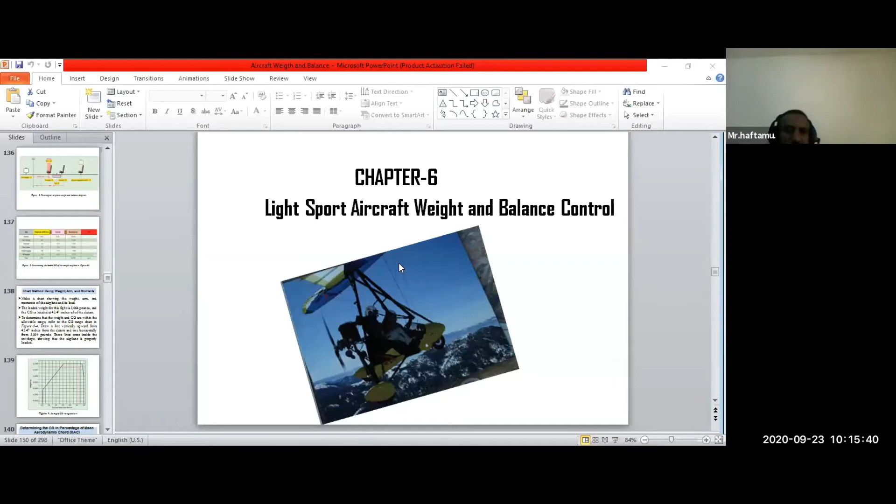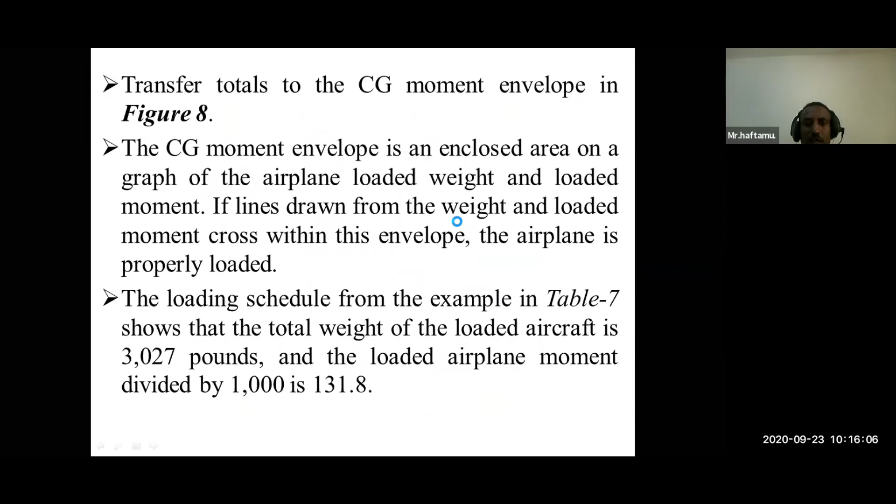So we can start our today's class. Last time we have seen chapter 5, multi-engine aircraft weight and balance items. Today we will see light sports aircraft weight and balance.

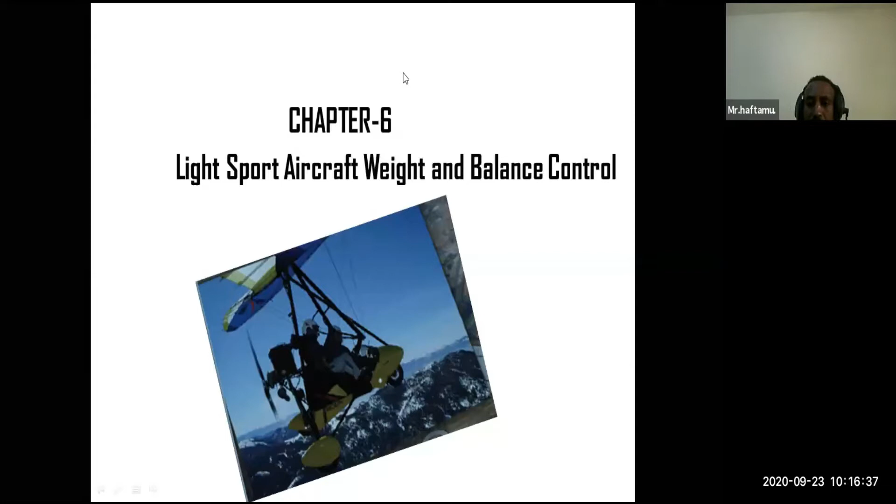There are different types of aircraft operational around the aviation environment. One of those is the light sports type of aircraft, and they have their own specific type of procedure for the weight and balance. So in this chapter we discuss the weight and balance procedures of light sport aircraft.

These differ from conventional aircraft, especially weight shift controlled aircraft, also called trikes, powered parachutes, and amateur built light sport aircraft. These types of aircraft have their own design and nature that make them different, and they have their own weight and balance procedures.

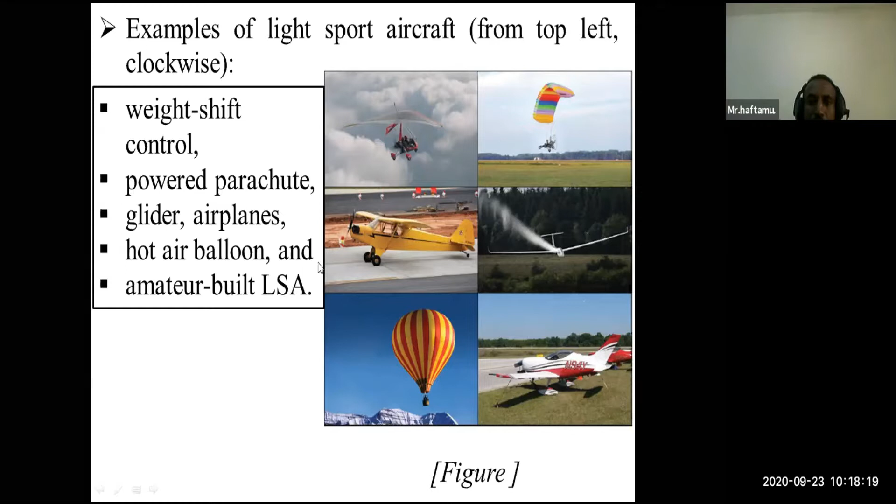For examples of light sport aircraft, as you can see, this one we call weight shift control. This is a powered parachute. This one is a glider airplane. This one is a hot air balloon. And this is an amateur built light sport aircraft. These are the aircraft we call light sport aircraft.

So light sport aircraft is a category of simple, very basic, small, lightweight, low performance aircraft other than a helicopter or a powered lift, and a classification of aircraft specific to the United States. So these aircraft are classified as light sport aircraft.

The Federal Aviation Administration defines light sport aircraft as an aircraft with maximum gross takeoff weight of not more than 1,320 pounds, or 600 kilograms for aircraft not intended for operation over water, or 1,430 pounds for aircraft intended to operate on water or at sea.

So a maximum speed of 120 knots or 220 kilometers per hour, 140 miles per hour, a maximum stall speed of this amount, and a maximum seating capacity of not more than 2 persons.

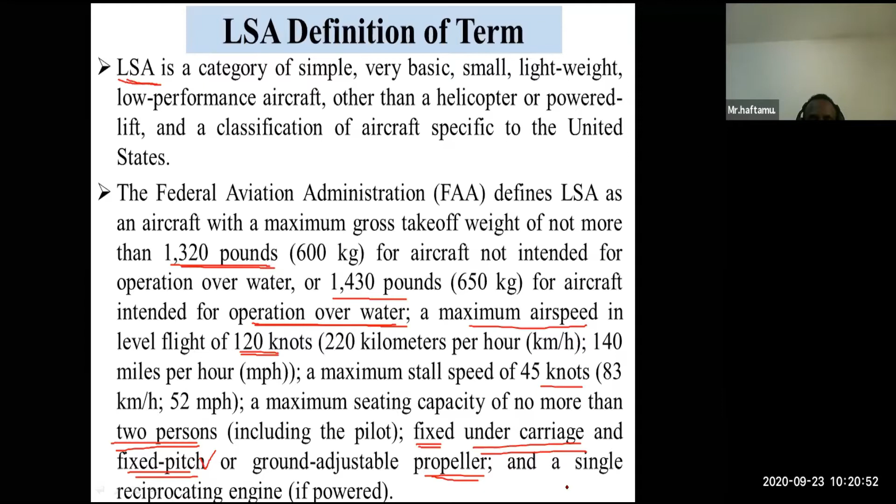And it should be a single reciprocating engine powered aircraft. Most of the time they are not powered, but if it is powered, it should be a single reciprocating engine.

So an aircraft that qualifies as light sport aircraft may be operated by the holder of a sport pilot certificate, whether registered as light sport aircraft or not. Of course, to operate this aircraft you also need to hold a certificate of operation.

Pilots with a private, recreational, or higher pilot certificate may also fly these light sport aircraft even if their medical certificate has expired, as long as they have a valid driver's license to prove they are in good enough health to fly.

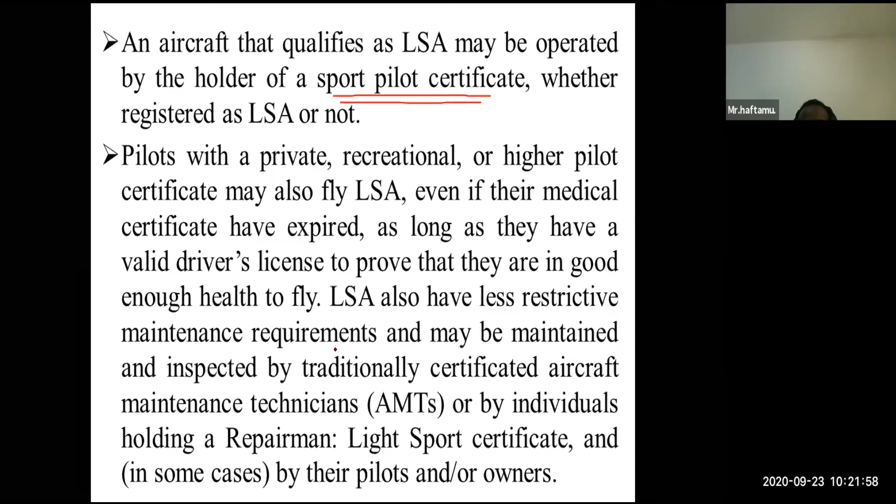So light sport aircraft also have less restrictive maintenance requirements and may be maintained and inspected by traditionally certified aircraft technicians. So these are about light sport aircraft - what is light sport aircraft?

But our main concern in this course is the weight and balance of an aircraft. Now, about the weight and balance of this light sport aircraft - I hope you have gotten some idea about light sport aircraft from the previous slides. So what is the procedure to perform the weight and balance of this type of aircraft?

Light sport aircraft, or aircraft such as these - balloons, powered parachutes, and weight shift (WSC) aircraft.

What was this WSC here? Weight shift control. Weight shift control type of aircraft do not require weight and balance computation because the load is suspended below the lifting mechanism. So we can see here that there is no requirement for weight and balance computation for this type of aircraft.

In general, for the light sport aircraft, this includes the balloons, powered parachutes, and weight shift control aircraft, the CG range is such that it is difficult to exceed the CG limit.

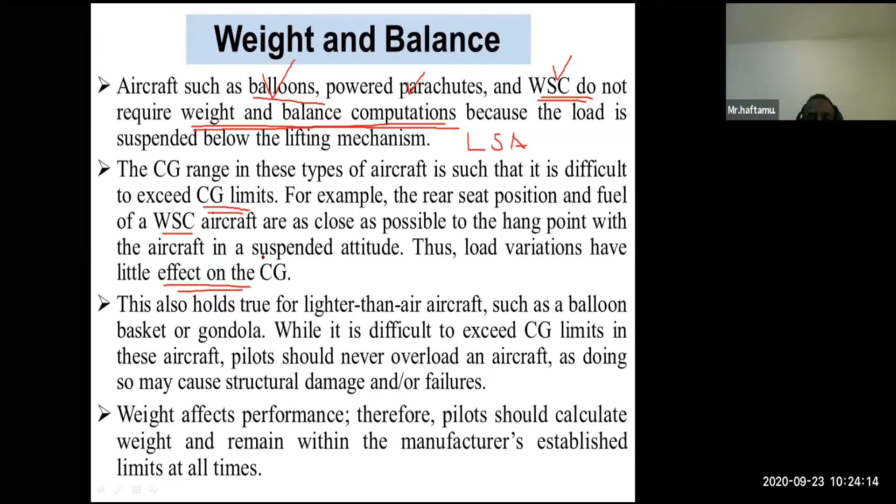For example, the rear seat position and fuel of the weight shift control aircraft are as close as possible to the hang point with the aircraft in the suspended attitude. Thus, load variations have little effect on the CG.

Thus, there is no probability that the center of gravity will be shifted, and it will not be affected as much. Therefore, that's why there is no need for making calculations of weight and balance.

So for example, if the lever is very short, it's not difficult to make it balanced. Therefore, the gap between the CG and the suspension point is very limited. Therefore, the probable variation of the CG will be very low and will not need to be considered.

This also holds true for lighter than air aircraft, such as balloons, basket, or gondola.

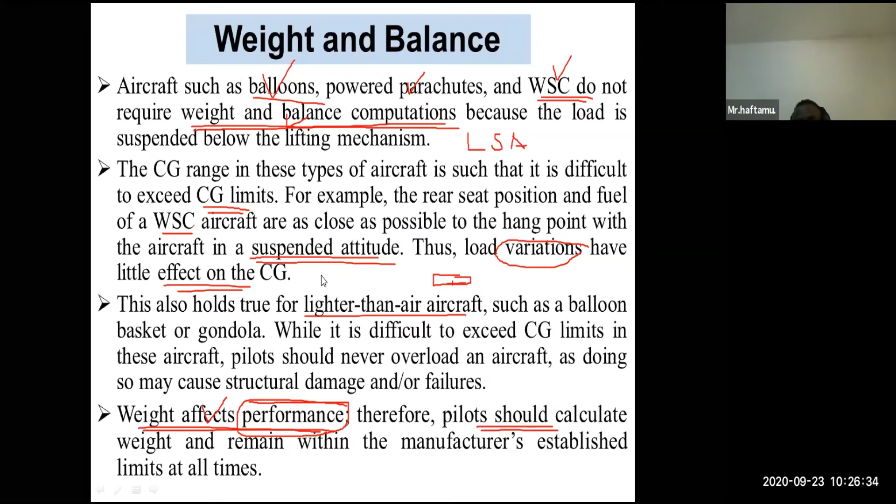Weight shift control aircraft are one and two place aircraft that exceed the criteria of an ultralight vehicle, but they do meet the criteria of a light sport aircraft.

So the definition of weight shift control can be found in 14 CFR Part 1. These are documents released by the FAA, and you can get the definition of this weight shift control aircraft in this document.

A weight shift control aircraft used for sport and private pilot flying must be registered by the FAA. Any flying object which flies in the territory of the United States, and in our case Ethiopia, must be registered by the Ethiopian Civil Aviation Authority, ECAA. So for Ethiopia it is the ECAA, and for the United States it is the FAA.

An airworthiness certificate should be issued to this weight shift control aircraft. A pilot's operating handbook should also be issued, with limitations and weight and loading documents aboard. As mentioned earlier, this type of aircraft is commonly called a trike.

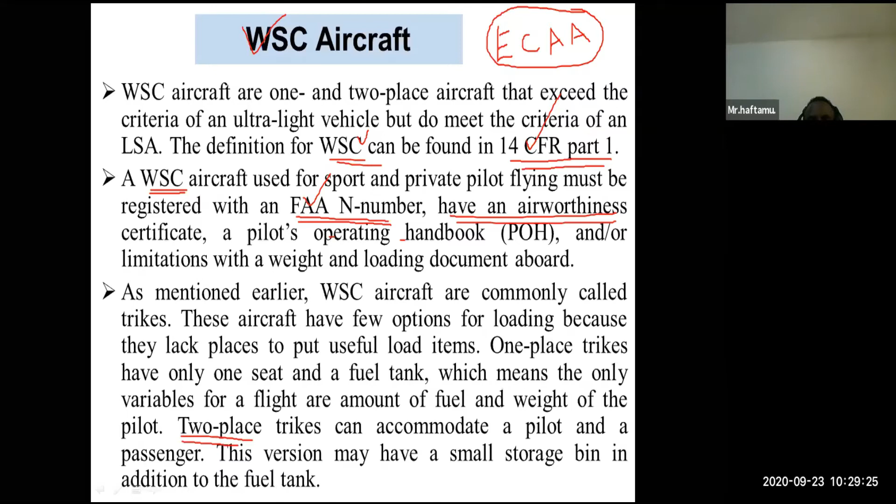So you can read these things. It's about the weight and balance. The most significant factor affecting the weight and balance of trikes or WSC aircraft is the weight of the pilot, and if the aircraft has two seats, the weight of the passenger also.

There may be two passengers, one pilot and one additional. So maximum, this type of aircraft will have only two passengers, including the pilot.

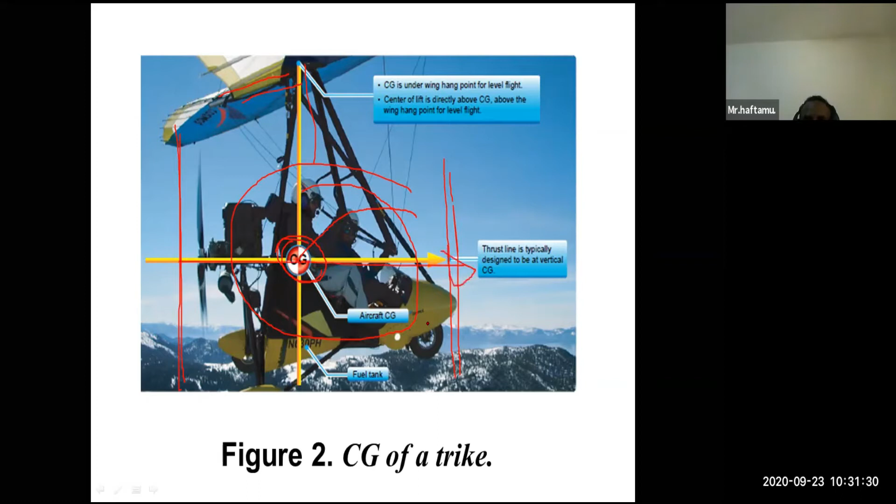So this type of aircraft, we call it a trike, and weight and balance is not such an issue for such type of light sport aircraft in general. For example, if the aircraft is flown by a heavy person, the attach point can be moved further aft, bringing the wing forward to compensate for the change in CG.

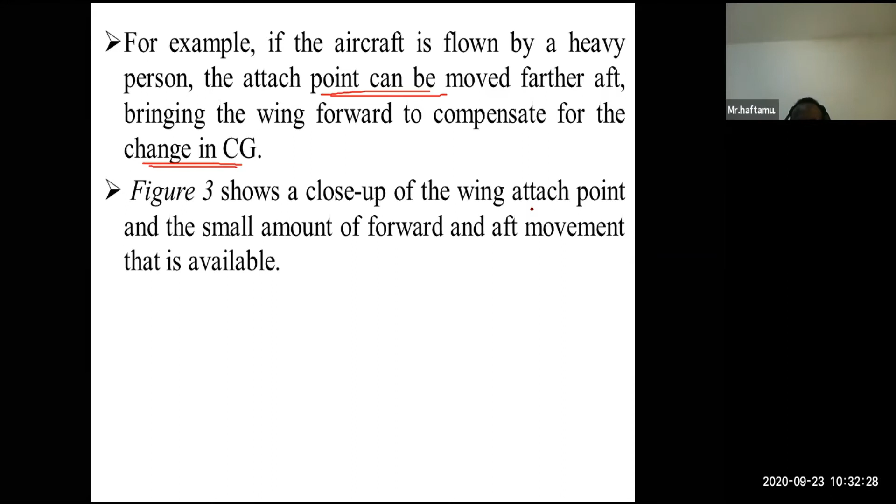So one time, maybe a heavy person might fly this type of aircraft, and the CG may shift. So you can make some adjustments while you are flying or operating this type of aircraft. Figure 3 shows a close-up of the wing attach point and the small amount of forward and aft movement available. So this is the wing attachment point.

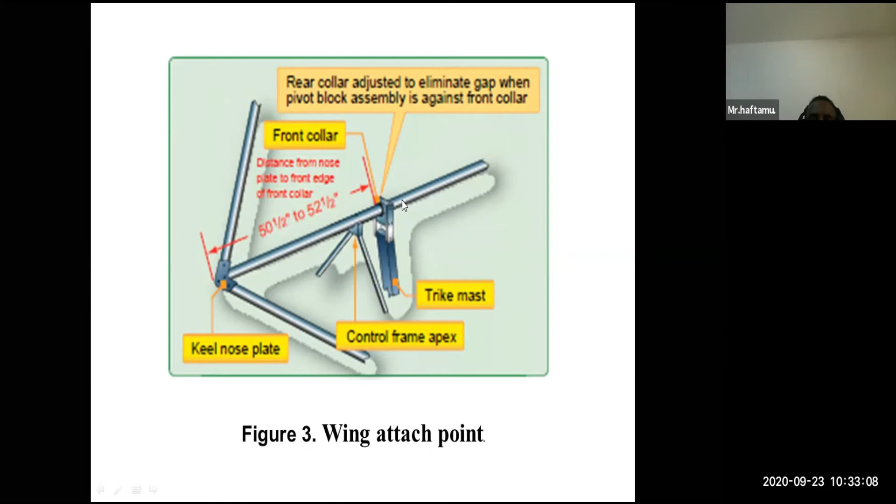So this is about light sport aircraft. Similar to airplanes, sailplanes and powered parachutes, increasing weight increases speed and descent rate. However, the WSC aircraft has a unique characteristic. Adding weight to this aircraft creates more twist in the wing because the outboard leading edge flexes more.

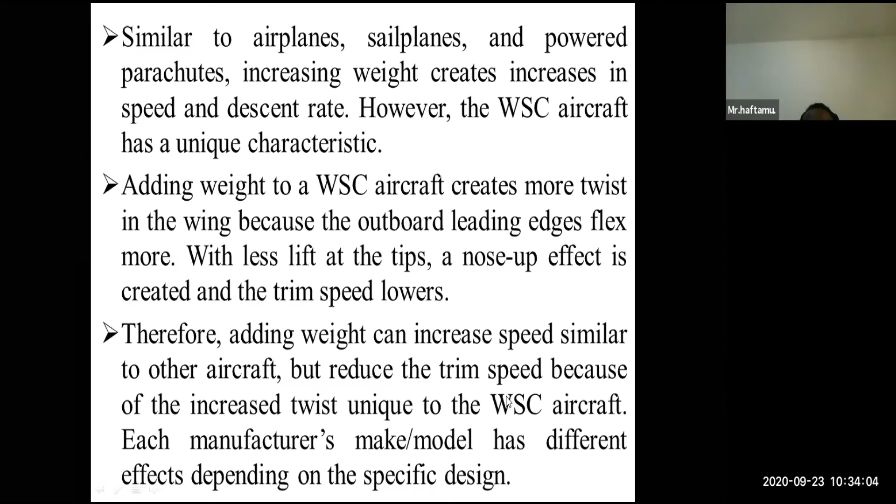With less lift at the tips, a nose up effect is created and trim speed lowers. Therefore, adding weight can increase speed similar to other aircraft, but reduce the trim speed because of the increased twist unique to the weight shift control aircraft. Each manufacturer's make or model has a different effect depending on the specific design.

For detailed weight and balance information, characteristics and operating limitations, always reference the specific manufacturer manual for this - this important book again has come. So you should refer to what has been provided by the manufacturer, which is the flight manual or the pilot's operating handbook for that specific make and model of aircraft.

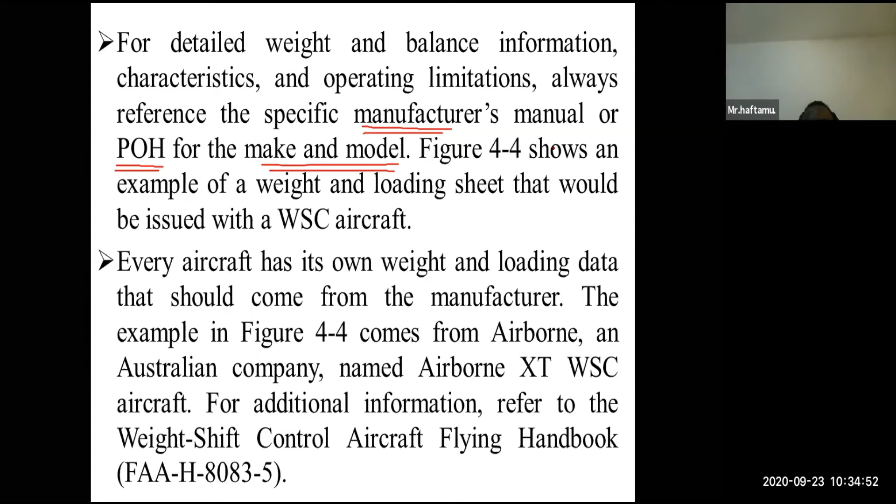So based on that, you will make your adjustments on the aircraft only. So it's not about achieving the CG range of the aircraft in this type of aircraft - you make adjustments and make ready for flight.

In the conventional or normal type of aircraft weight and balance procedures, you increase or reduce weights according to what you have calculated, whether your CG range is within the limit or not. So you know your CG limit is within this range that will be given.

So on the normal type of aircraft, you will make adjustments based on your CG location. But in this case, it's not. You make adjustments on the airframe, on the aircraft structure.

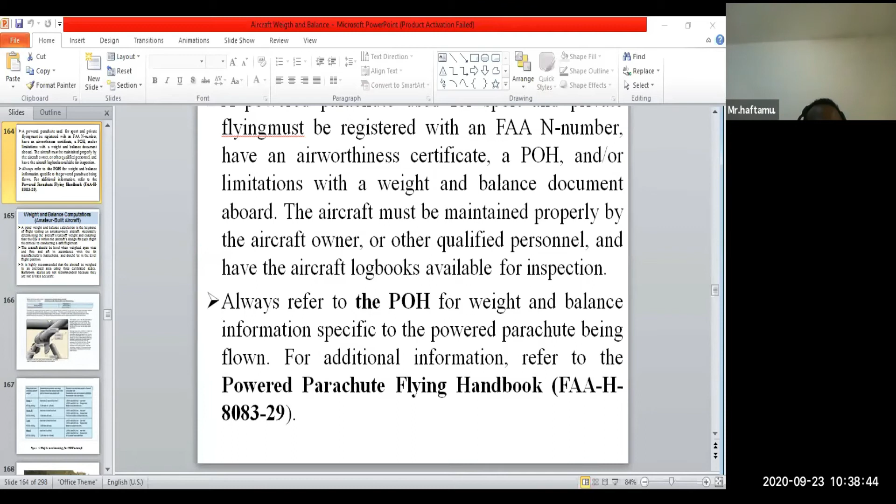There are different manuals or documents provided by the FAA. For example, here is this book, as you can see on the screen. It is FAA H8083-18. This is the Flight Navigator Handbook.

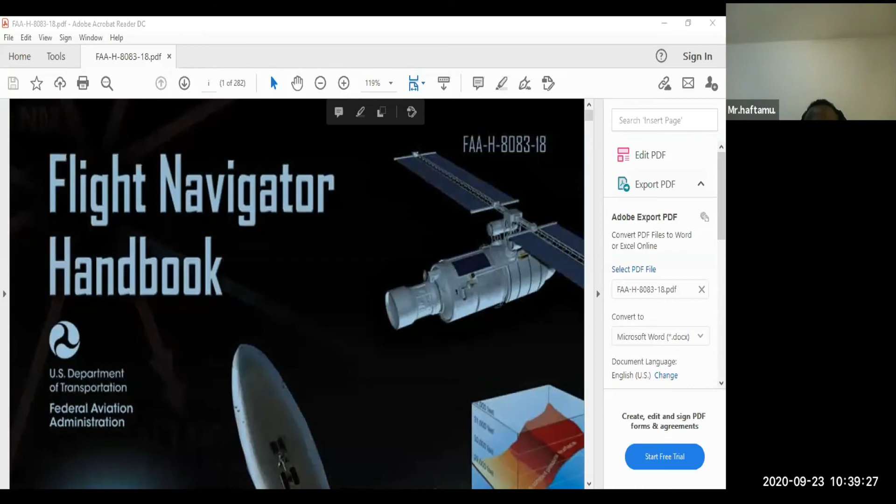And another book, which you have been given as a textbook, is the Pilot's Handbook of Aeronautical Knowledge. This one is newer. The Pilot's Handbook of Aeronautical Knowledge is also given as FAA H8083-25A.

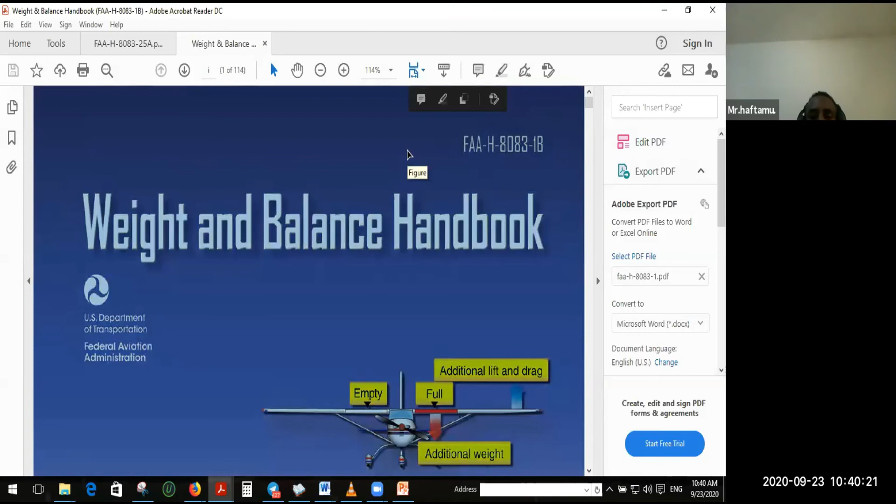Also, you have the textbook we are using now. It is called, as you can see, this one - the Weight and Balance Handbook, and it is given as FAA H8083-1B. So there are a series of books which are delivered to aircraft operators by the FAA, and we should use them accordingly.

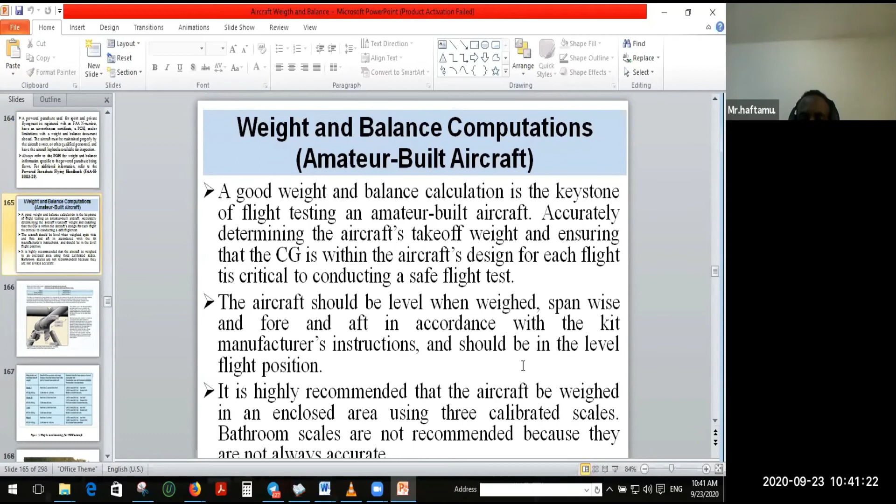These are the important textbooks which you should be familiar with as professionals working in the aviation environment. You have to be familiar with these handbooks. Not only these books, but also other authorities deliver publications to the airlines and to different industries in aviation.

For example, IATA is one of these, called the International Air Transport Association, and it also gives different documents related to aviation.

The other topic is weight and balance computation for amateur-built aircraft. A good weight and balance calculation is the keystone of flight testing an amateur-built aircraft. Accurately determining the aircraft's takeoff weight and ensuring the CG is within the aircraft design for each flight is critical to conduct safe flight.

The aircraft should be level when weighed, span-wise and fore and aft, according to the kit manufacturer's instructions, and should be in the level flight operation condition. It is highly recommended that the aircraft be weighed in an enclosed area, such as inside the hangar, as we have seen. In the third chapter, I think we have seen the procedures that we should follow to do the weight and balance.

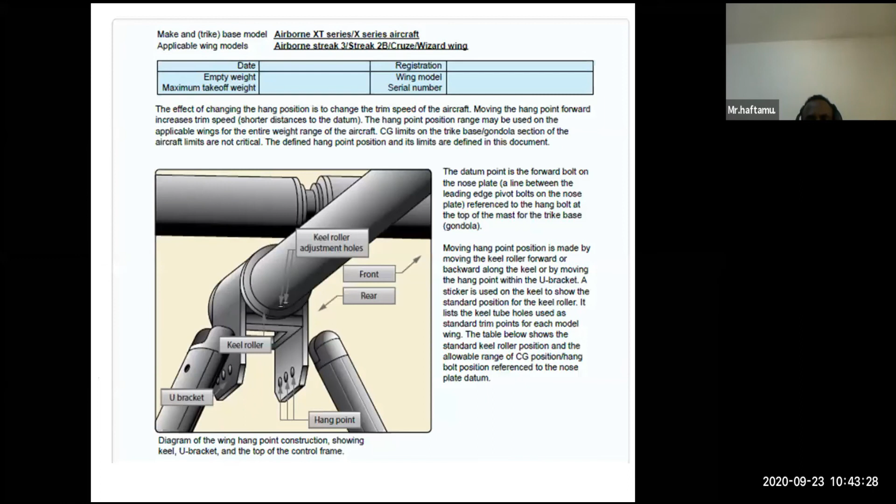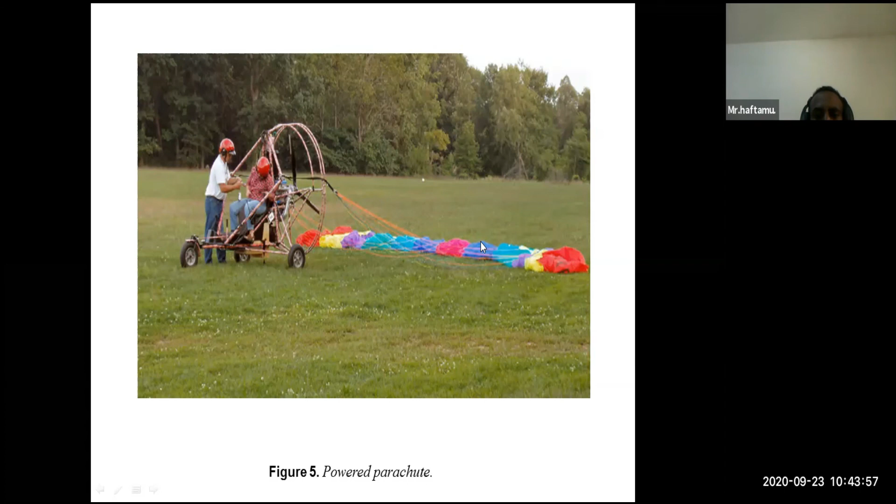Parachutes are related to the previous powered parachutes. It's a kind of parachute, but as you can understand from the name, there is some kind of power added to the aircraft type, so this is the powered parachute. This is the concept behind the light sport aircraft actually.

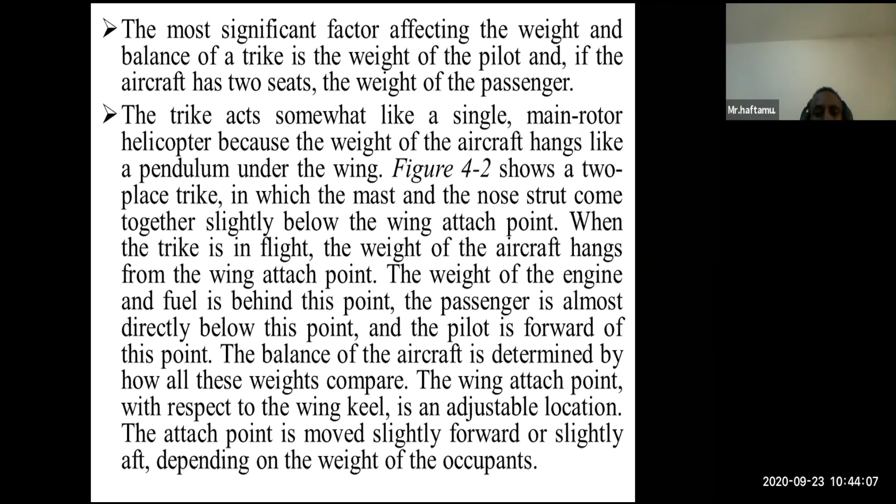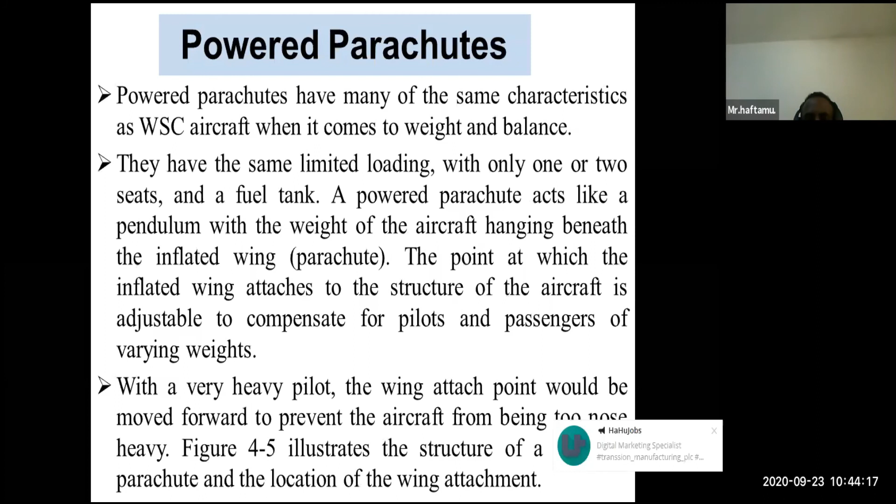We have gone very fast, I think. We have covered many of the topics.

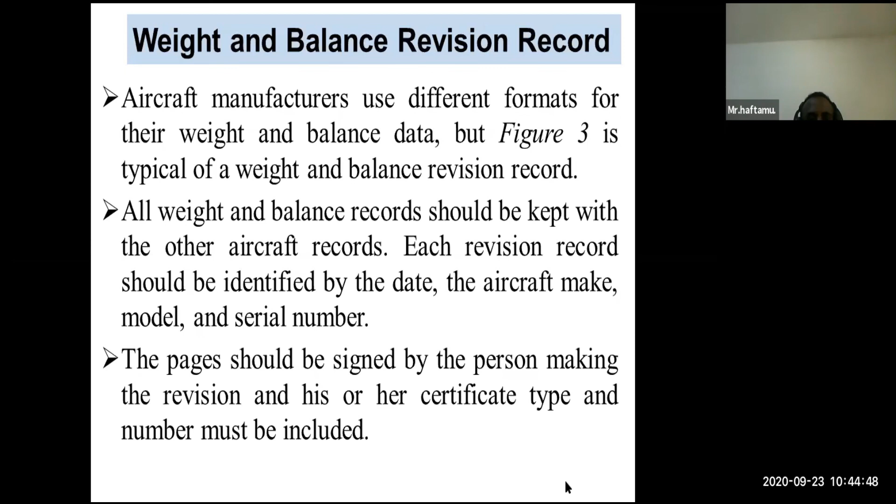And now it's time for you to present your assignment.